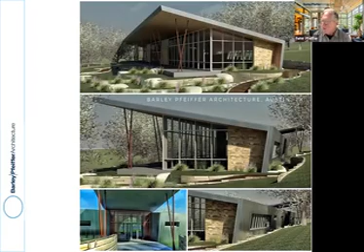And then we also are in what I call boutique commercial stuff. We do community centers for new towns around the country. This is one that's outside of the San Antonio area, where we have a large porch that's shaded and facing south, so they'll take in the breezes and have fewer mosquitoes and be able to watch their kids in the swimming pool below. So we really do try to apply the sustainability and passive solar design principles to absolutely everything we do.

Now, this is a professor who, in the late 70s, when I was thinking about going to either MIT or Berkeley for my master's, I read about at the University of Texas, who was developing this computer analysis program. So I drove up from Houston, where I was living at the time, to visit with this man. And I loved some of the very practical things he said. And this is a good one. He said, think about what enhances your personal comfort, then design the building with that in mind. And boy, if you really absorb that, it cuts through so much of the chaff.

For example, in Austin, Texas, you would be much more comfortable standing in the shade than having a heavy winter overcoat wrapped around you, insulating you. So that tells you, don't get so hung up on the R values of your walls and your roof in this climate, but do shade your windows and do a shading umbrella type roof. Deal with the things that are important in your climate. Now, if we were in the mountains of Colorado, obviously that would be different, but it just helped us understand how to prioritize our clients' money. And when I really absorbed that statement, I was very impressed.

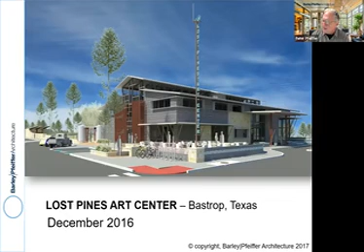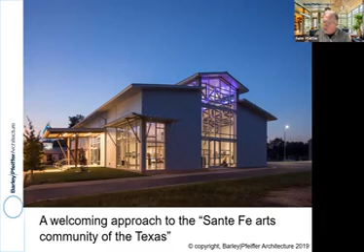And then, of course, there's this thing that Winston Churchill said about the environment shapes the architecture and the architecture shapes us. So let me show you one example of this art center we did a few years ago. You'll notice on the left-hand side there's that Corten steel, that rusty steel shading device, because those windows face west. But these windows face east, where the art gallery is. So we designed the building so the things that would be used in the evening are on the east side, where it's cooler, and the things that would be used during the day on the west side had to be well shaded. So right from the start, the layout of the building reflects being responsive to the climate.

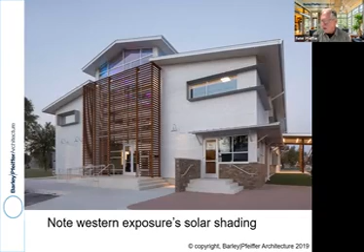So here, the big open glass on the east side, the art gallery is not occupied in the morning. It acts as a great beacon for people coming off the highway to see what's going on. But here on the west side, you see we took a lot of effort to make sure those windows had a fair amount of shading associated with them. So there's an example of, by design, trying to respond to the climate, but even by the original programming of the building, we were making sure we were responding to the climate.

The origins of green building, it's kind of a neat story that I'm gonna just brag a little bit about, because that guy, Arumi, got a lot of us involved with this whole movement of using metrics to do more refined energy analysis and to guide our clients better. And mind you, this is back in the late 70s. I actually didn't come till 81. But out of that group of us and others, there was a volunteer group that created this program called Austin Energy Star. It was volunteer efforts by some architects and engineers, and people who worked for the utility department, because we had an issue here in Austin where the city wanted to invest in a nuclear power plant and the citizens weren't happy about that.

So we looked at, well, what can we do? Can we create what we called at the time the conservation power plant? In other words, instead of building more power capacity, can we lower the consumption during the peak times of the day? And it worked. Austin Energy Star became the first municipal energy conservation program in North America, and the DOE recognized it and asked if they could ride on our coattails a bit, build on what we built, and they took it and they created Energy Star from it.

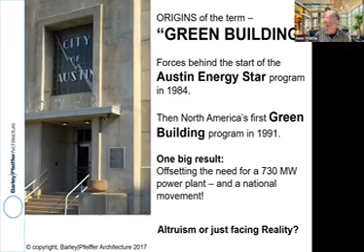So we figured, we got to go out to the building community and get them in on this conservation issue. And so we changed the name of Austin Energy Star to the Austin Green Builder Program. And then it became the Austin Green Building Program to pull architects and engineers into the program. And that's how we formed the first green building program in the United States. And it's pretty neat because we never had to build a new power plant for about 25 years. And we did expand that landfill, but we didn't have to expand it nearly as much. And we still have one of the lowest rates of consumption for water of any major city in America. So that's a little story about the origins of green building.

And then came LEED for Homes, which I think was great. I called LEED the screaming young teenager wearing the bikini, standing on the street corner, jumping up and down, getting everyone's attention. That's good. They did a fantastic job at popularizing the concept of green building.

But I wasn't happy with the checklist approach. I think it missed the mark. I mean, this is a LEED Platinum home in Houston, Texas. Any of you who've been to Texas realize that type of sunlight, unfettered, coming into a living space is going to be a horribly uncomfortable place.

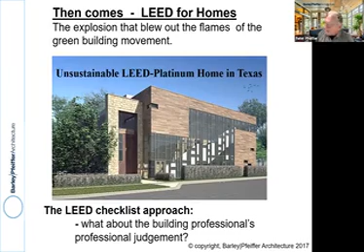So I don't really care what the rating of the R value is of the walls, or whether or not those stones were sourced locally. What I do care is that the design doesn't work for this climate. How does a project like this get a platinum rating?

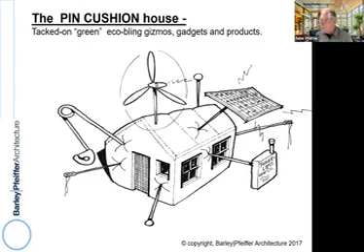And we began to see, as we got into the 90s and the early 2000s, what I call the pincushion home, where you would have just a standard home that's not really built well and certainly not built to respond to the environment, but they tack on a tankless water heater or a PV system on the roof, or maybe even a wind turbine, and sell it as green. And we see that around the country.

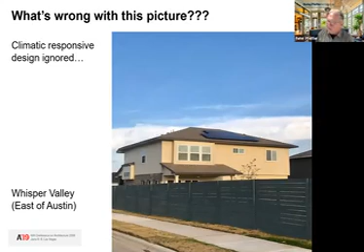This is a place outside of Austin where you see those unshaded windows facing west, but yes, they've got solar panels on the roof. Heck, guys, just don't have your windows facing west that are unshaded, and you'll be better off than investing in solar panels on the roof. So we don't promote that.

And I think, unfortunately, society has absorbed the idea of green building as a bunch of things you tack onto the house. But where I think green building presently is failing is we tend to portray an overly complicated approach to doing what we call green building, and it appears to many people to be too costly. I like the idea of KISS, keep things simple.

And then there's the other misconception that the buyer thinks that everyone's already doing it as a standard matter of practice, so they don't really have to be very critical with their thinking and their evaluating of what this builder is telling them. And then I do believe it focuses too much on the minutia and misses the point about what really matters. For example, we got all into these details about an expensive green roof and how to do the best waterproofing and stuff like that.

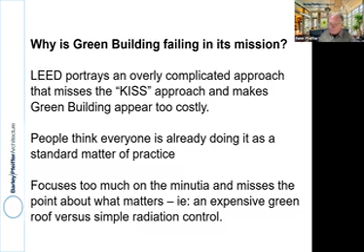Well, what are we trying to accomplish with this green roof? If in our area it's simple radiation control, then there's a whole lot of other things that are a lot simpler and a lot less expensive that will be just as effective. So let's keep the goal in mind. And that's why I say, always ask yourself, why are you doing this? What is it you're trying to accomplish?

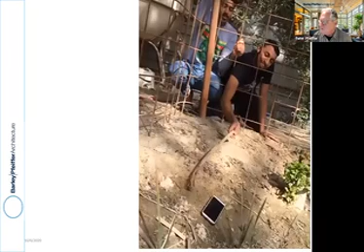Because I hope this one comes here, but this is an example. Look at this guy. His buddy's going to help him get his iPhone, right? No, he helped him get his stick. So the point is, think about what you're trying to do before you go do it.

And then think about these basic tenets. I know these are mine, and I know they sound very simplified, but this is what I think green building boils down to. It's reduced consumption of stuff, whether that's energy, water, materials. It's improved health, indoor air quality is a large part of that, and reduced environmental impact. Now, we've only got one session today, so we can't talk about a day's worth of stuff. But in this particular talk, I am going to zoom in quite a bit on indoor air quality.

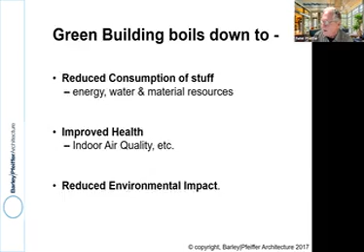Over the years, we changed the term from green building to high performance, at least for our clients when they were coming in, because there was a negative connotation associated with green building and greenwashing. So I said, look, let's change these goals or change the narrative a little bit so we could put it in perspective for people that they could understand.

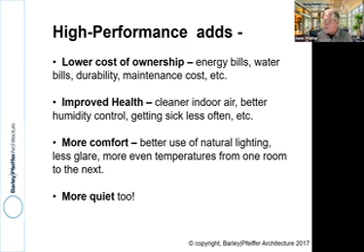And so to me, it means lower cost of ownership, lower energy bills and water bills, less maintenance. It means improved health. That means cleaner indoor air, better humidity control, getting sick less often. Put the attributes in terms that the public can relate to. And then more comfort, better use of natural lighting, less glare, less eye strain, more even temperatures from one room to the next, and a more quiet building.

And we continue to say, let's just keep it simple and try not to rely on gizmos and complicated things because they break and they cost money and time to fix. I don't mean to be coming down on tankless water heaters because I think they have their place, but I can tell you that if you really want to keep it running optimally, the amount of maintenance it takes to keep a tankless water heater running is a real expense.

In our calculations, it takes about 25 years to pay for itself, a tankless water heater versus just a good tank type water heater. Now, this might be different where you are, particularly if you're in a very cold climate.

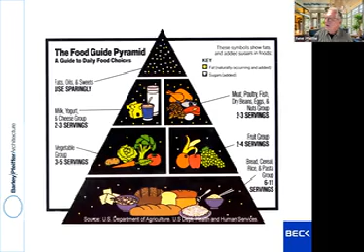Okay, so when we try to help folks prioritize the idea of what to do to make their home energy efficient, I think back to the old food pyramid that you might remember when we were kids from the Department of Agriculture that encouraged us to eat more fruits and grains and vegetables in our diet, go a little bit sparingly for the meat and poultry and fish, and certainly be very sparing with the way we consume fats and oils and sweets. So that's it. Okay, great.

So from our perspective, that means the base of the pyramid should be, don't build the house any bigger than you need to. Make sure it's tight. You can't heat or cool your entire neighborhood. And we'll get into tight and ventilating it right later. Make sure we respond to the solar orientation and use natural vegetation to protect the house when possible, or protect it from the sun and the wind. So those are the basic things that get baked into the house by design.

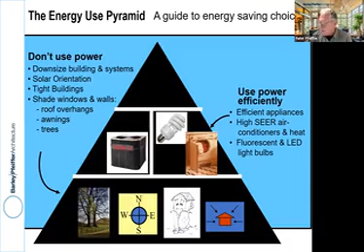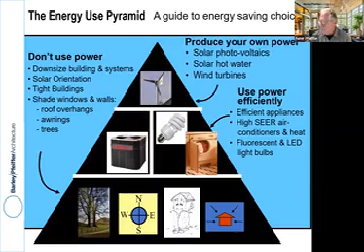Then you layer on top of that more efficient appliances and lighting. Those aren't quite as valuable because they're going to need replacement. They're going to break. The things at the base of the pyramid will never break. They're baked into the house, so to speak. And then after you've done layer 1 and layer 2, then you can look at producing your own power, maybe solar photovoltaics. And the reason why I do it this way is because still the most expensive stuff is at the top of the pyramid, and the least expensive yet most effective stuff is at the bottom of the pyramid. So that's a great way of helping our clients understand perspective.

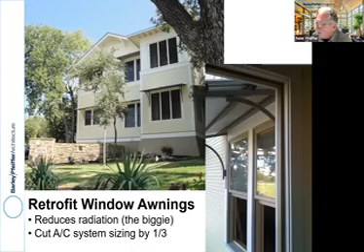And they had some other advantages. They kept sun off the windows so you didn't have to close the blinds during the day to see what's going on. So there was better daylighting in the house, and there was less use of electric lighting. And they also kept water off the windows so the windows didn't get dirty nearly as much, reducing the maintenance on this house quite a bit. So that was by design.

Now, this is an example of what too many people have been doing, and we say, don't do this. Think about this. Yeah, I know that butterfly roof design has been the popular rage again for the past 10 years, but look at the consequences of these houses. This is a neighborhood that's all solar panels on the roof, but yet they don't have good passive solar sun shading. If you just shaded those windows better by having a more appropriate roof design or some awnings over the windows, you would have less air conditioning loads, you have less lighting you need because people close the blinds, there's too much glare. Just shading those windows would save more energy every year than that solar system on the roof produces. So that's a pincushion house, and that's what we don't want to do.

And then I started thinking as I went through my career more and more, that really what you can be if you're going to be a good consultant, and I would like to think an architect is a good consultant, to a client who's probably spending the most amount of money on any one thing in their life, which is building a home, is we want to be the inspired generalist. We want to help not only our clients, but our builders understand the relationship between things. Like we all think here in Austin about a roof being important to keep the water out. Everyone does. But if you do that same roof just a little bit differently, you can also make it so it keeps the solar radiation out. It becomes a shading umbrella, and we'll hit that.

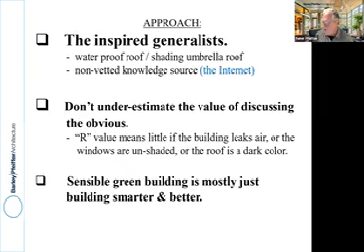We've not made a green home. We've just made a lousy home that's got a lot of insulation stuffed in the walls. Now, again, this is for a cooling dominated climate, but I think you get the gist of what I'm saying. And so my view is green building is mostly just about building smarter and better and helping your clients make more informed decisions.

When we start off with a client couple, we go through programming where they tell us what they want. And very importantly, we try to get into finding out why do they want that? Because there are ramifications to that steeply pitched roof that they like the look of, because we don't get snow loads here, and that will use up more material and it will make it difficult to shade the windows. People don't understand this. They have to have you as the guidance counselor for them, help them make smart decisions.

Tall ceiling heights, I know they're popular, but it's more air to condition, more air to dehumidify, more air to heat. So people need to know that many of these things come with ramifications, and it's your job to help explain that to them. Once we get into program, it starts off even with helping them select the best lot. If they're really interested in a passive solar home that's going to have good comfort and lower energy bills, find a lot on an east-west running street.

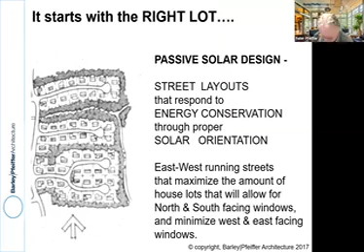And I say that because most homes, particularly in more dense neighborhoods, have the dominance of their windows on the front and the back. And if that's the case on an east-west running street, that means that most of your windows will face north and south as opposed to east and west. It's a lot easier to control passive heat, solar heat gain when your windows face north and south. So there's just a little example of some obvious stuff that often gets missed.

But we did about 20,000 energy analyses of homes in the earlier part of my career for the production builders. And I can tell you, the exact same house facing west needed about 30 to 40% more air conditioning than if it were facing south. I saw that time and time again.

The other thing we like bringing to our clients' attention is stop looking at the darn price per square foot. I know it's a popular metric that came about in the 80s, but it makes about as much sense as me asking you, gee, that's a good looking shirt you're wearing there. How much was that per square inch? It misses the point. The bigger point is what's the total cost of this project going to be?

Construction might be about a quarter of the cost, but then there's maintenance and insurance over the next 20, 25 years that'll almost be as much. There's energy consumption too. So design with the total cost of ownership in mind. Now, I know if your market is just people buying and staying for a few years and flipping the homes, this won't make sense.

But if it's somebody who wants a home they're going to hold on to for a long time, this metal roof is a great example. At the time, it added about $6,000 to the cost of this house compared to a shingle roof. It added, I think, about $30 more in their 30-year mortgage monthly payments. But there are a few attributes to it. It'll be the last roof they ever have to put on. And because it was a class 4 hail rated roof, their insurance premiums were reduced significantly.

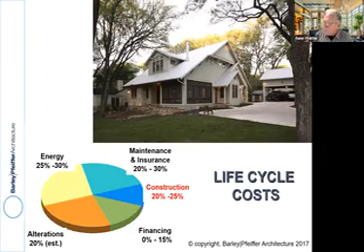And because it was installed in such a way to act as a shading umbrella, its energy costs were reduced significantly. So it actually costs less money to operate this house from the start because of those savings in energy and insurance compared to what it added to the mortgage payment. So there's some guiding we give our clients there regarding looking at the longer term ownership cost.

But here's another thing that may be obvious to most of my audience, but not to the public: paint colors on the outside of your house have a tremendous effect on its comfort, especially as it gets warmer and warmer in a lot of cities across the country. That light blue wall was 102 degrees at 4 o'clock in the afternoon, while the brown siding right next to it was 130 degrees.

So if we're talking about insulation values and R values, the resistance to heat flow, there is a whole lot more heat that has to be resisted in that bedroom that's got the brown painted siding outside versus the bedroom that's got the light blue paint outside. You would need twice as much insulation to have the same comfort level in the bedroom that has the brown paint on the outside versus the light blue paint.

So these are super simple things, but people miss them. They don't think about it. All right, let's jump into some of the specifics. You've heard me talk about roofs, and I'm going to jump into how we handle moisture infusion because that's a big one. And first and foremost, think of the roof as shedding water from the building, period. It's not the number one thing for better indoor air quality, but it does relate to indoor air quality, and I'll show you how in a minute. But it's the number one thing you can do for durability.

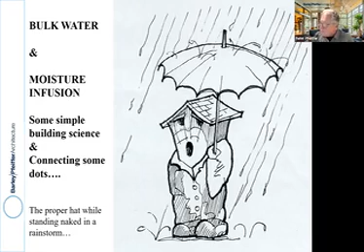Shedding the water from the house is like having a big umbrella over your head in a rainstorm. You could be practically naked, and if you've got a big umbrella, you're okay. But if you have no umbrella over your head, you better have a perfect raincoat. And perfection is not a word you see in our industry that really survives the test of time.

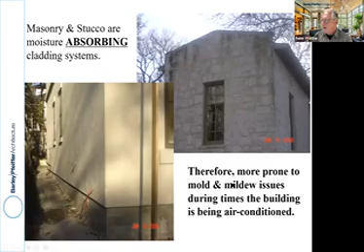Look at these buildings, these houses, these condominiums with no overhangs. These buildings are only 8 years old, and look at the condition the sidings are in, the walls are in, because there's no shedding of the elements. Or this one here, the stone with the mildew and the absorption, because it's limestone, into the wall system because there's no overhang.

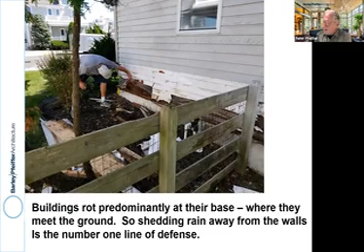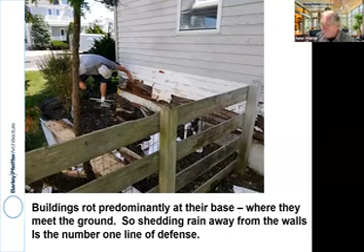But it also points out that when water falls off the roof and backsplashes against the house, it causes rot. And most buildings tend to rot predominantly at their base where they meet the ground. So shedding the water away from the house a good distance, at least 3 feet, will have a profound effect on the durability and affect other things like the mold and mildew that's accumulating inside the wall cavity and migrating into the house.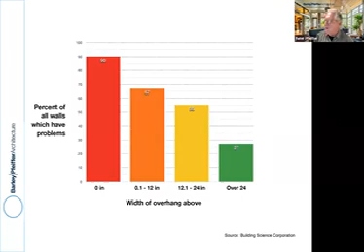So here's a great little slide from a friend of mine, Matt Risinger of Risinger Build. The width of the overhang in terms of the percentage of all walls which have problems. Notice 90% of the walls that have problems have no overhang. A relatively small 27% of the walls that have problems have a 24-inch overhang. We like doing an even broader overhang than that.

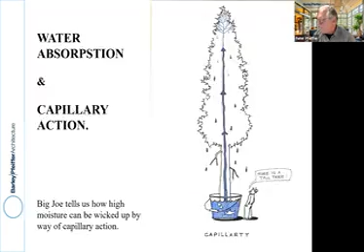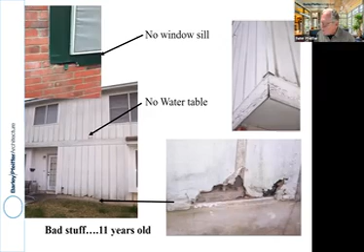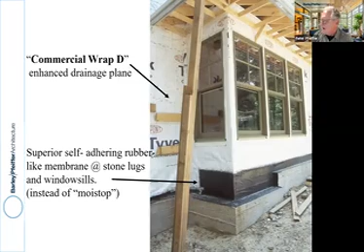So that gets to the whole idea of why we have to be very careful with how we handle the base of the house, because lawn sprinklers also attack a house. So we do this rubber peel and seal membrane. This is my own home I built 20 years ago, the first time I did this, showing the peel and seal around the whole base of the house. And then we would do, in this case, a commercial grade Tyvek. And then I do 30-pound felt over that too, just for the base of the house. We just go with the Tyvek from 3 feet on up, but the base of the house needs attention. And the reason why I'm talking so much about this water management is this is the connecting of the dots between moisture and humidity control and indoor air quality.

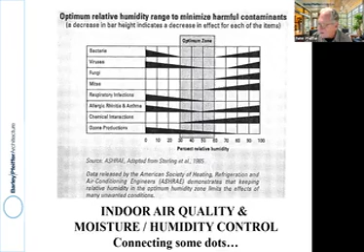Peter, we've got a question that might be appropriate for a couple slides ago, from Rob Buchanan. All right, well, let's hit it. Okay. Does the combination of raised heels, which improves attic efficiency, also lengthen the eave, improving water performance for a double win? Yeah, sure.

All right. Let me stay on this because I'm on a roll. Yes, you are. All right.

So the other thing that I want to point out is the importance of reducing cold condensing surfaces in the building structure. That's one of the reasons why I like spray foam so much. And no, I'm not sponsored by any of the spray foam people. But if you don't have a cold surface inside the wall system or the house system, then if you've got humidity migrating from the bathroom out on a cold winter day in Denver, or on a hot July morning in Austin, humidity trying to migrate in and feeling a cold surface and condensing, then you've done a lot to keep the indoor air quality good.

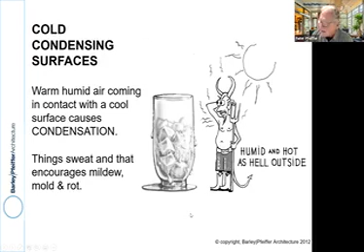So you understand humidity and a glass of iced tea don't work well together. You'll get all that dripping on the outside of the glass because the humidity is hitting the cold condensing surface and reaching dew point. Very similar. You don't need a lot of insulation to make a big difference. Think of the R value of this koozie on that cold soda. Very little R value stops the condensing.

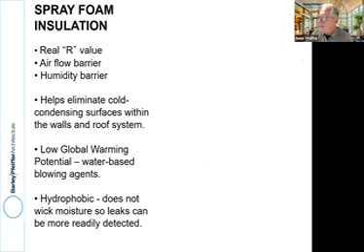And that's one of the things I really like about foam. You don't have to do full thickness foam. You could just do a 1-inch spray or a 2-inch spray and then bulk fill with something else like cellulose or whatever you want. But you really stop the airflow and you prevent there from being any kind of cold condensing surfaces within the wall and roof system.

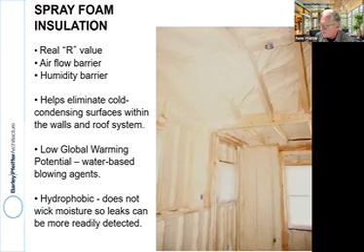So you get a humidity barrier, an airflow barrier, you get real R value, and then the better foams have a low global warming potential and they don't wick moisture either. But that's one of the safety elements of foam with regard to indoor air quality: you eliminate cold condensing surfaces and stop the flow of humidity.

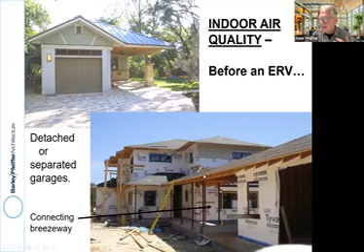Another point on indoor air quality, specifically by design, is where is the pollution coming from? Ask yourself, what's the problem you're trying to solve? Instead of immediately presuming you have to put an ERV in a home, let's think, well, why don't we just manage the sources of pollution in the first place? An attached garage is a major source of air pollution in a house that relies on a ducted air conditioning and heating system, because very often the house will go into negative pressure and suck those fumes in from the garage.

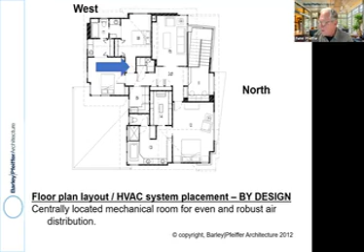Here's another example. It's a little bit complicated, but this talks about reducing duct length. The house on the left is what the air conditioning contractor wanted to do. The air handler is roughly there in the center off the hallway, and he wanted to run all the ducts, the blue ducts, delivering cool air to the perimeter of the house. You don't need to do that anymore if you have good windows and good air sealing with something like spray foam. The version on the right is what we ultimately did, where we had much shorter duct runs, saved money, and had better airflow.

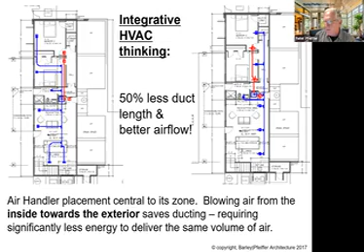So the air conditioning industry has got to catch up with what the other aspects of the building industry are doing that affects the way they design duct systems. And this is one example of that. And again, you see this thing about the air quality and humidity control.

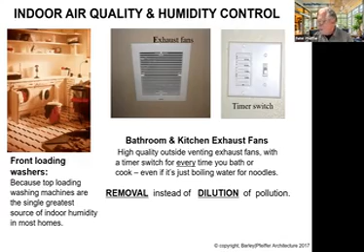Well, let's move into it. Now let's get rid of another source of pollution, which is the humidity that comes from doing your dishes or using the bathroom or doing your laundry. A front-loading washing machine puts out less humidity than a top loader. Good exhaust fans on a timer make it so that when you take a shower, the exhaust fan runs for another 15 minutes after you get out. So it really gets rid of those sources of humidity right there at the source instead of letting them migrate throughout the house.

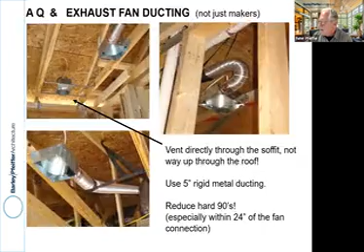And by the way, in the upper right-hand corner, there's a big boo-boo. Don't do that. Don't have a 90-degree or 180-degree bend right outside the fan. It's not sexy stuff, but you see, we're managing pollution at its source. We're managing the way the air distribution occurs by design. And all these things make it so you have to worry less about the problems with indoor air quality, I believe.

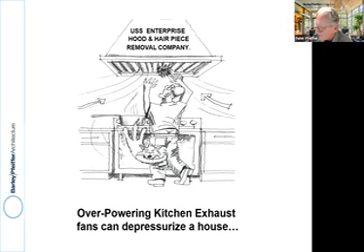Now, by the way, with regard to kitchen exhaust, be careful with your clients about those overly exhausting ones, because they can actually make the house go negative, and then that draws air in from places you don't want it to come from, the garage or down the chimney. So exhausting is good, but you gotta manage it.

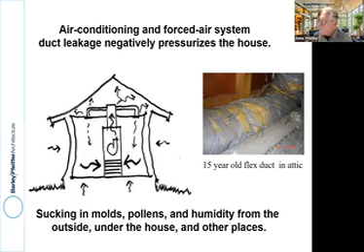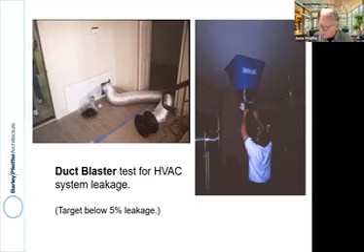And talking about the house going negative, good ducts that don't leak is important. This diagram says it all. If you lose 20% of your conditioned air into the attic, not only are you throwing away money, but you're also making the house go negative. So that's why you make sure your ducts are well installed and test them. We want to get below 5% leakage. That's critical. Austin was the first city in America that required duct blaster tests on every single house built because of the connection between the quality of the ducts and indoor air quality and energy use.

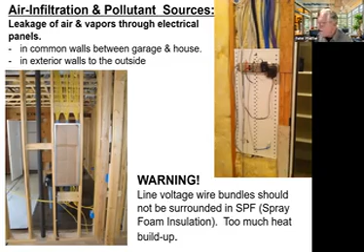Now, some little details I thought I'd throw in here. Think about where you're putting your electrical panels. If your electrical panel is like the one on the right, which is between a garage and a conditioned space, well, you've just made a big fat hole in your thermal envelope for humidity, molds, and pollens to migrate into the house through. So we put electrical panels on interior partitions, not on that wall between the garage and the house, so it's not interrupting the thermal envelope, and we're not putting insulation around those wires, because especially with SPF, if you put a lot of insulation around the wires, you could have an overheating problem and deteriorate the insulation on those wires. So put your electrical panels on interior partitions.

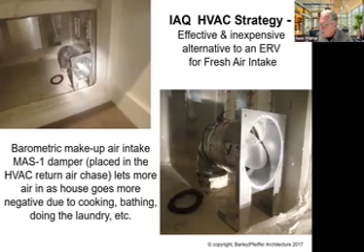And then when it comes to makeup air, here's one very simple strategy. Just use this barometrically sensitive damper in your return air chase. It will respond to whether or not you're running the bathroom exhaust fan or the kitchen exhaust fan, or having a fire in the fireplace, and let makeup air come in as needed and go through the air handler, be filtered and be dehumidified if needed, and then go into the house. But the point is, we're only bringing in fresh air as we need it, depending on how the house is being used. Those are good strategies.

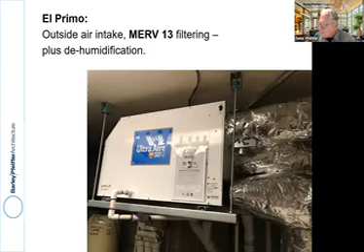Probably, if you have the money, sure, a really good system like this, Ultra Aire, brings in outside air, does filtering constantly for the house, and it does dehumidification. That is the primo way to go. But these other ways I told you are, I think, the foundation of indoor air quality by design and managing pollution sources.

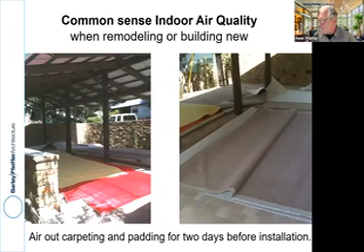And speaking of managing pollution sources, air out that carpeting and that padding for 2 days before you install it. So the vast majority of the off-gassing can occur in the first 48 hours outside instead of inside your house. Think about things like the stovetop you're using. You know, a typical gas range wastes between 60 and 85% of its energy, and the products of combustion go up into the house.

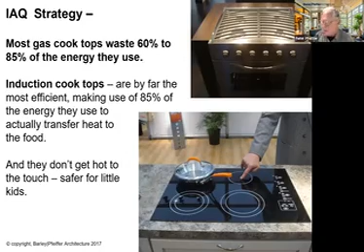If you're building a tight house, you really need to think about this. Induction cooktops are great. About 85% of the energy goes into the food, and only about 15% is wasted, and you don't have products of combustion. Plus, they're simpler, they're safer to touch and things like that.

So going back to this professor from 1981, he also taught me the value of using metrics so we could not only prioritize high-performance building strategies for our clients, but put these in perspective for our clients. So it's metrics to actually use to do good programming and then designing with.

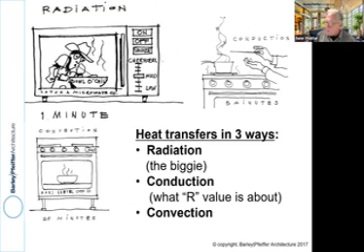So that tells us, why are we venting attics in the south if the object is to cool the heat that came from radiation? You see, this is the early 80s, and this is where the concept of sealing attics came from, because we realized that ventilating an attic in Texas was like crawling into the microwave oven and blowing air on that bowl of chili. I'll just say the term, you're just pissing in the wind. That's when we started experimenting with the whole idea of sealing the attic, but doing radiation control.

And we already talked about this with the colors, but let's jump to the roof because I see we have less than 10 minutes to go. When we were thinking of radiation control, we used to drape aluminum foil between the rafters before putting the decking up so we could get a radiant barrier. Then I had a building company. We got sick and tired of that, crawling all over the rafters with these big rolls of aluminum foil.

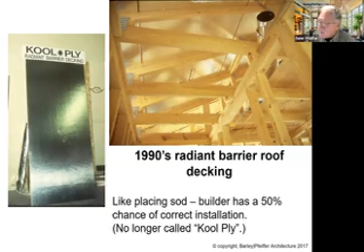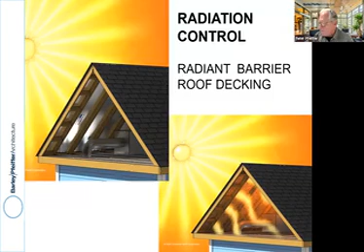So we just started stapling the foil to the decking before we put it up on the roof. And then we started gluing it to the decking, and we thought we had a pretty cool idea. So we named it Kool Ply. And then along came Louisiana Pacific, and they bought it from us. And now it's what you all know as TechShield, I believe is the term. But you see the idea. We stop the attic heat at its source, which is solar radiation. Instead of dealing with the symptom, which is ventilation, we stop it at its source.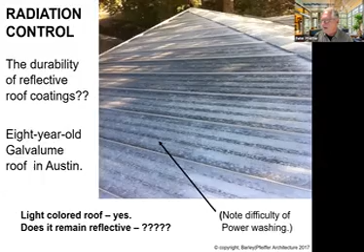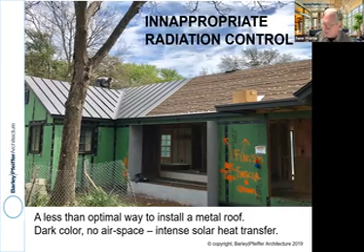And by the way, never put a metal roof directly onto the roof decking. It'll just transmit the heat very, very effectively from the sun right into that house. And the roof won't last as long, because if any moisture gets underneath it, it can't dry out very well. Let me show you an alternative I experimented with when I built my house.

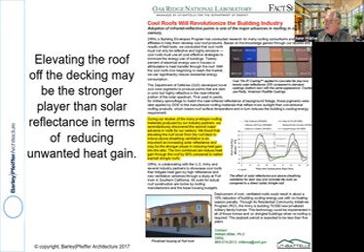Oak Ridge did a little study on the efficiency of this, and they found that elevating the roof off the decking is actually the stronger player than solar reflectance in terms of reducing unwanted heat gain. And the other thing about solar reflectance is it wears out. Even these coatings on these roofs they were testing were only designed to last 5 to 10 years. If you do this roof, you do it once and you're done for the rest of the life of that house. So it's a shading umbrella.

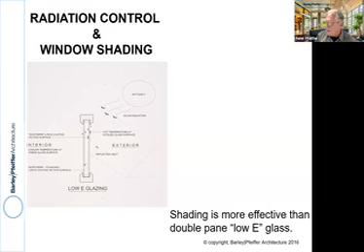And now radiation control in terms of sun shading. Yes, we do awnings above almost each and every window for obvious reasons. If you keep the sun off the glass, that's a lot more effective than worrying about the low-E or the southern low-E aspects of the glass.

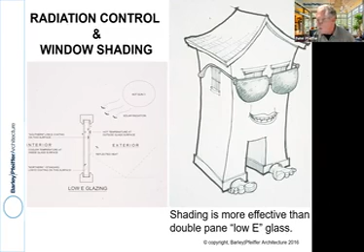Sunglasses help your eyes, but a big broad-brimmed hat would help them even more because your eyes would be in the shade, is an analogy to think about. So we really do rely on those sun angle calculators. They help, and that's how we get to design the size of the overhangs.

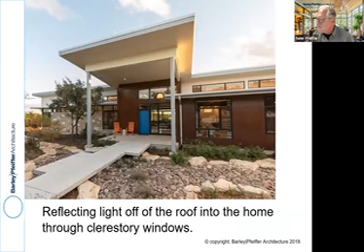But the overhangs also help reflect light into the house. Look at these upper clerestory windows in this slide. That light that hits the roof in front of them is reflected into this house over there in the top, and it reflects deeply into the home. So we have a really nice, pleasant space with no direct solar radiation.

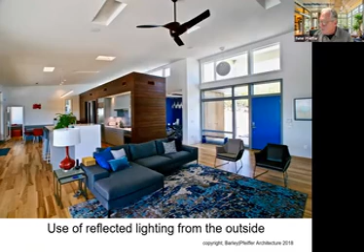That's a critical one. If you're evaluating a home design anywhere where air conditioning is used a lot, look at how well the builder and the architect managed direct solar radiation. We want reflected light. We don't want direct light.

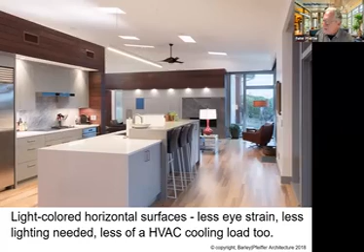Here's another example too. Oh, and light-colored reflecting surfaces. Critically important because then you use less lighting. If you use less lighting, then you have a lower air conditioning load. So we do light-colored countertops and light-colored floors.

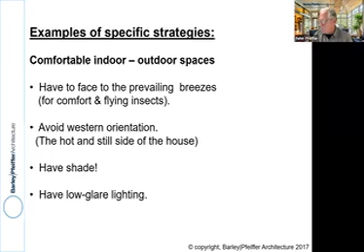And I'm going to leave you with this challenge. What about having this be your goal? What will it take to make your next project, whether it's a home or a building, allow the occupants to tread with a lighter carbon footprint? That's really the goal. And think this way instead of how to attain LEED points, because in the end, what really matters is how we can live with a lighter carbon footprint.